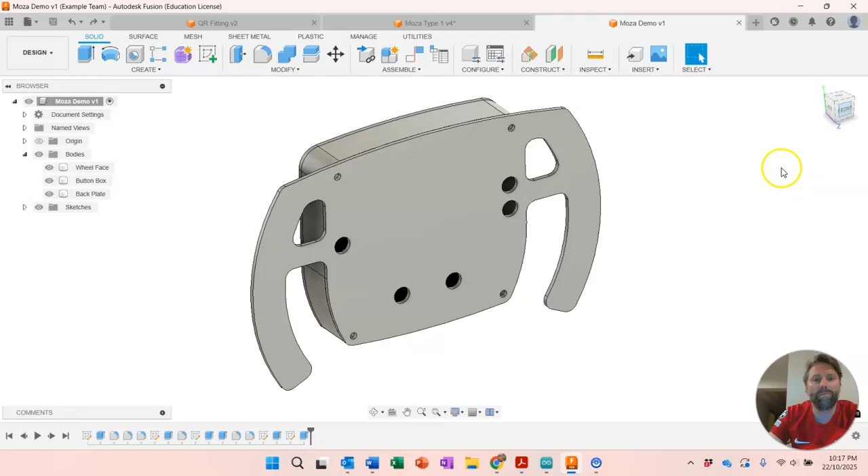We're going to get started on our grip or grips. This example is going to have fairly basic grips, so we're going to start with modeling up this left-hand side front half of the grip. We will end up mirroring this to the other side, but that won't be just yet.

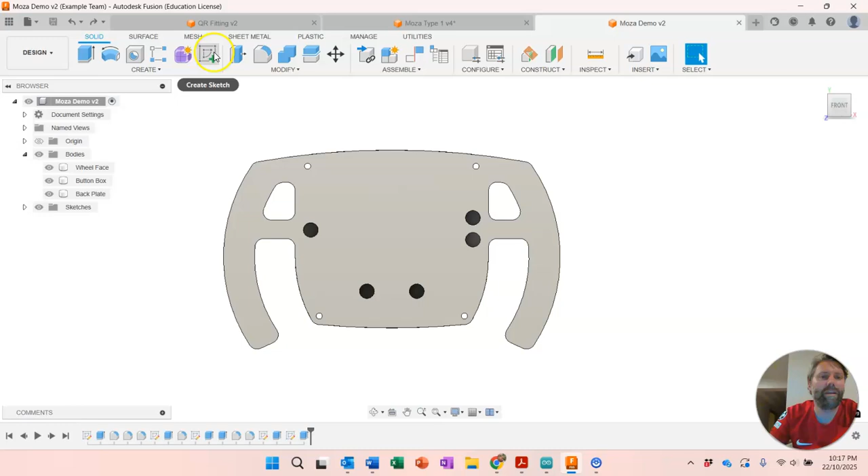So we're just going to design up this front half, front left-hand side. I'm going to start a sketch on that front plate, hit P to project, select the face, and that brings in all these purple lines and dots. Now the dots are kind of handy as I'll use them as reference lines. So the grip is going to come all the way up.

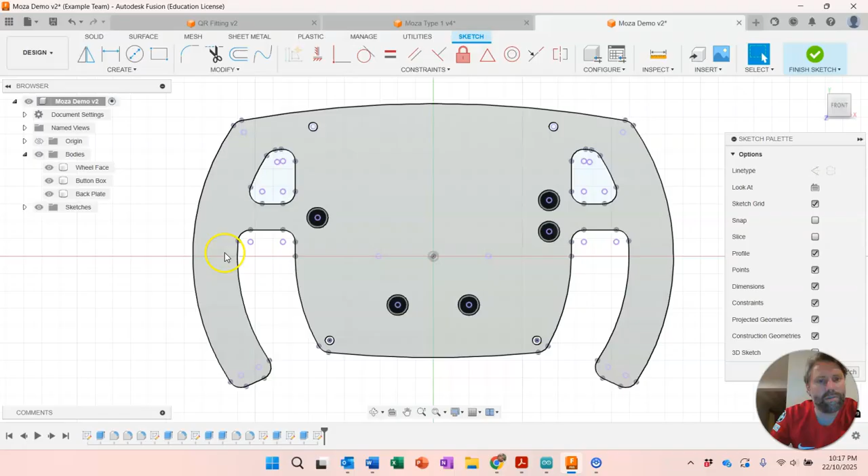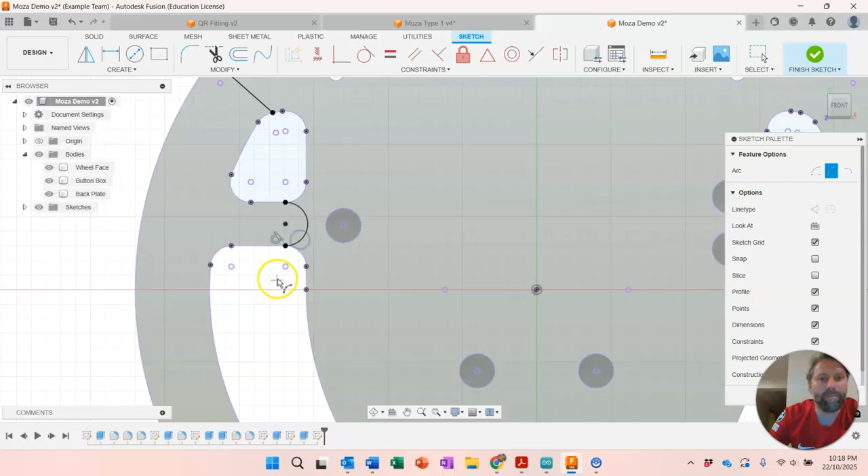I don't need it to extend too much further beyond this top edge here, so I'm going to use the Line tool and just draw one across here. I'll also maybe use the Arc tool, 3-point arc, to join these two. So now I should have an extrudable element which I can create my grip on.

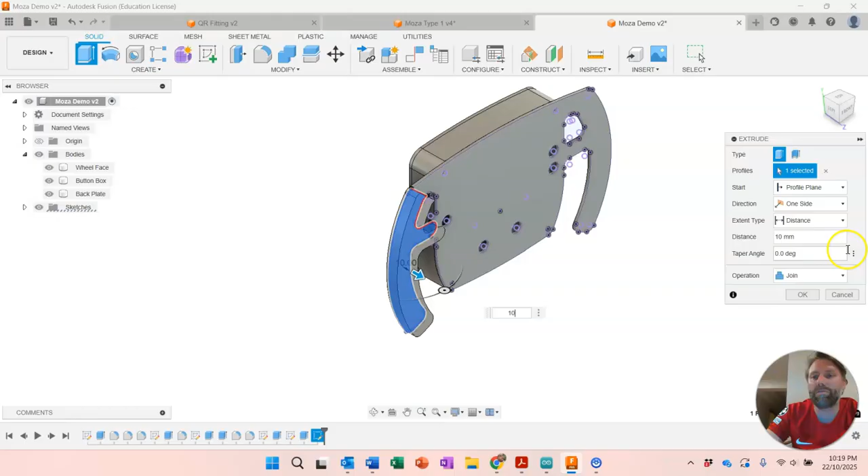So we are going to create this as a new body again. This is going to be 3D printed, it's not going to be a part of our acrylic face. So new body, 10 millimeters, and okay.

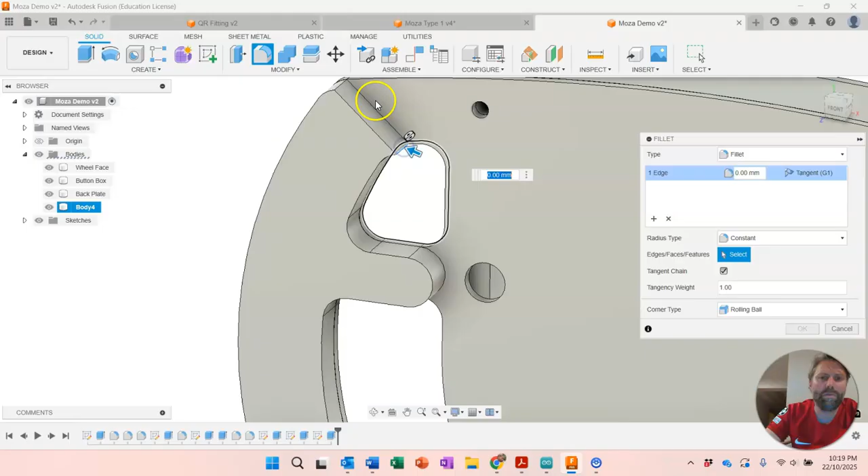Now let's tidy this up. We'll put some fillets in here as well - one up here on these two edges, just to tidy them up. Let's see what 7 millimeters looks like... 7 would be nice.

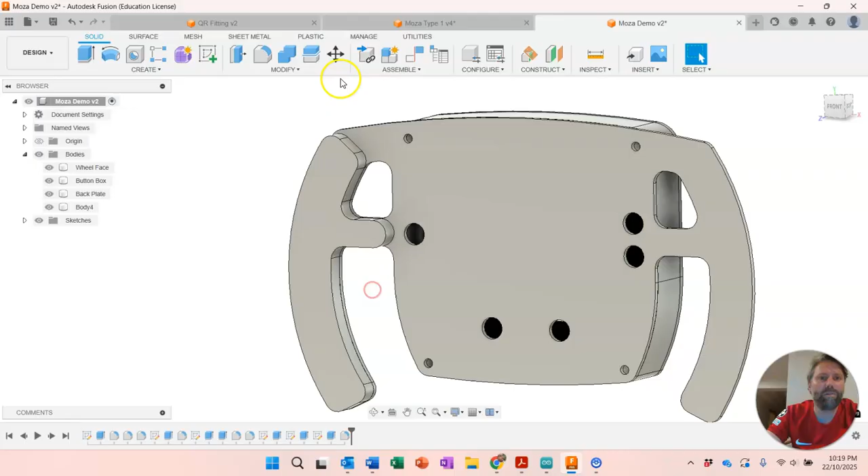And we'll also put a fillet on here as well. Now keep in mind, this is only 15 millimeters wide, so the most I'll be able to put on would be 7.5 to get a perfect curve through there. Let's get 7.5.

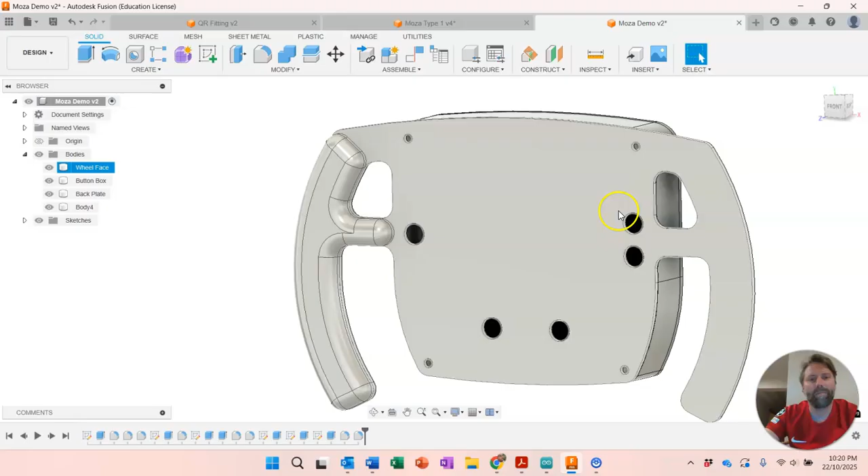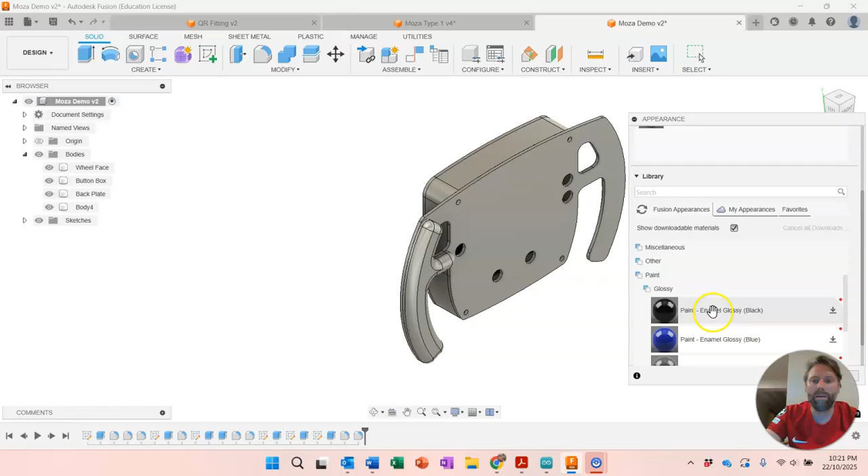So it might be worth at this point adding your colors if you have not already. A brings up your appearance menu, and from here you can bring in all sorts of different colors and finishes. So I'm just going to use paint and glossy for mine, and I'm just going to drag black in for my body.

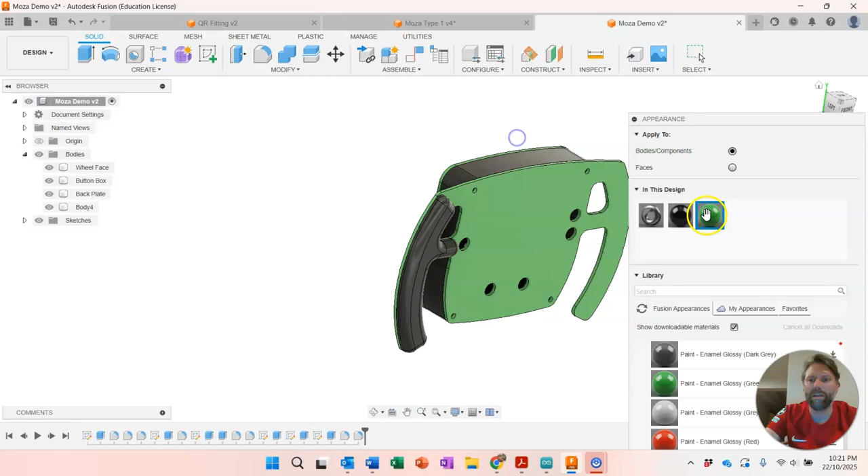I may regret that later when I try to work on it. And we'll go with a green on the acrylic parts, just so I can tell sort of what's what. And I might actually - if you double click on in this design, you can change that color - so I might make it a little bit more teal sort of finish, a bit more Aston Martin sort of green. And there we go.

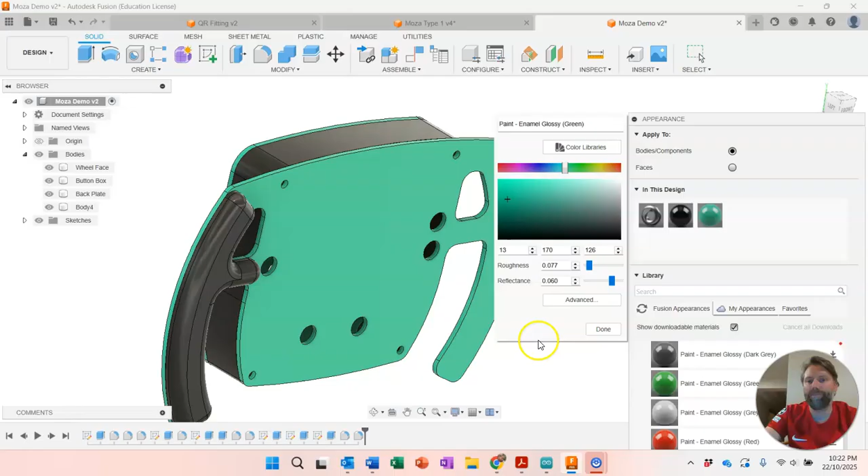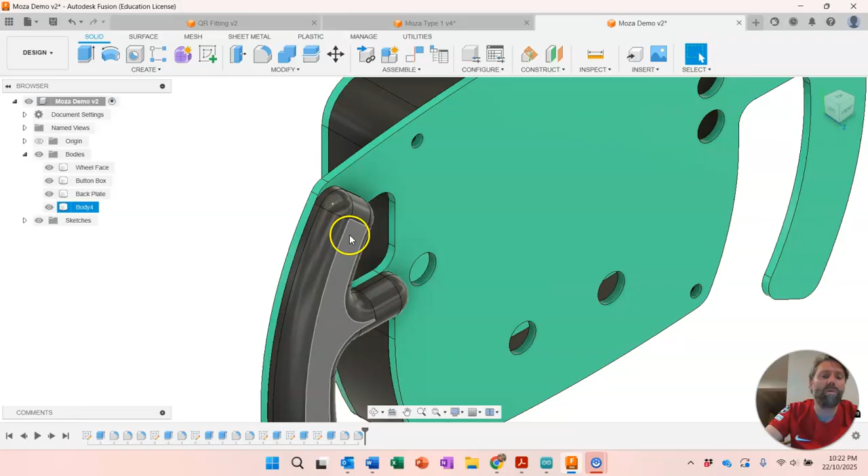Close down it. Before we mirror, there's a few elements we need to add. One is the other half of this grip, and the other is some bolt holes to lock it into place. So we'll get started on the back half of this grip.

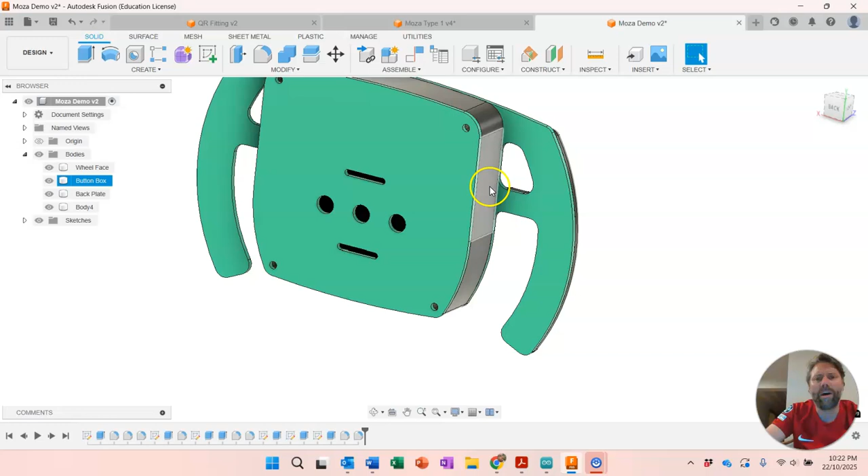Now, I could just mirror this design, this front grip, straight around to the back, because there's no reason why that won't work. What I want to do in this case is make sure it joins into this side of the button box, which adds a little bit more structural integrity to the whole design, and makes it feel a little bit more intentional.

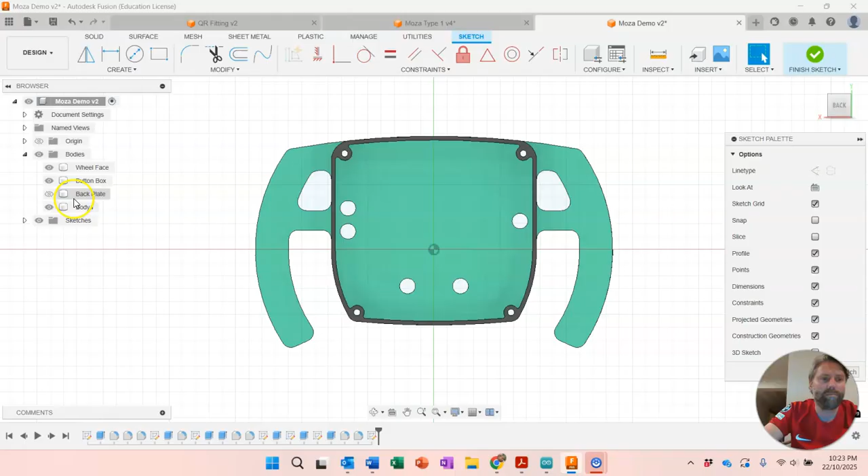So we'll create our sketch on the back plate. We'll hide that back plate - sorry, the back of the face plate is where we created that sketch. Just going to turn off that face, and we can hit P to project that front grip.

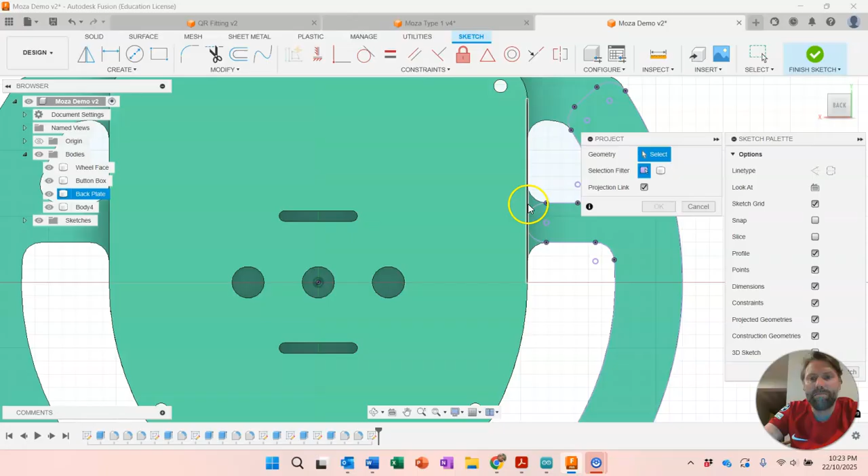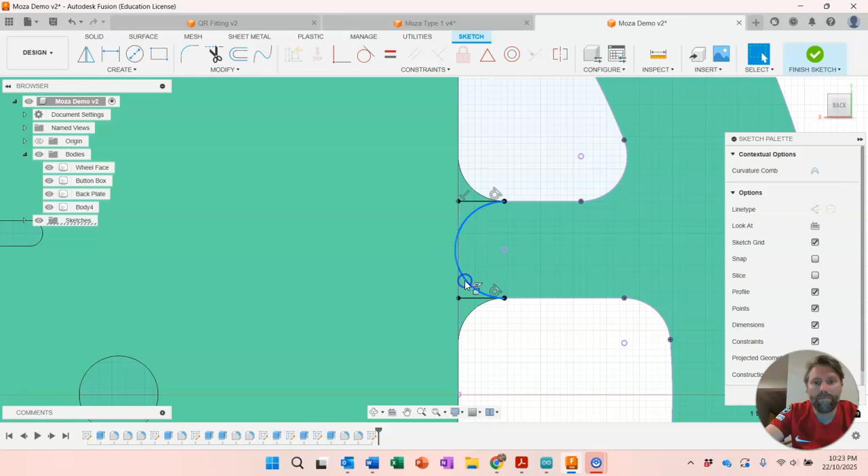And what I'm also going to project in is this part of the button box. In this case, I just want this to continue out straight instead of curving, so I'm going to drag those two elements straight across and make sure that...

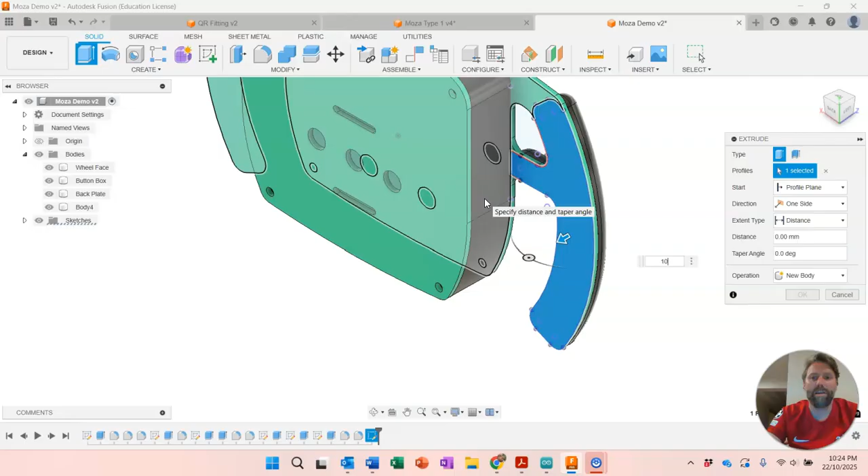I will turn this into a construction line, so now my grip will have a flat section along that back edge. Finish the sketch from here, and we can extrude. Go 10 millimeters again, it's going to be a new body, and we might as well paint it up with our black.

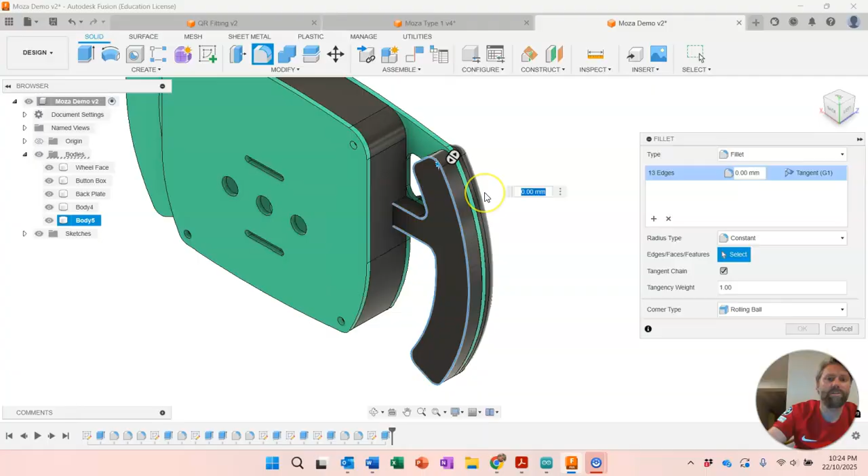Again, we'll put our fillets on. In this case, the top one's already done for us, so we're just going to choose this one, 7.5, enter. Now at the moment, that profile just butts up against the side of the button box. What I wanted to do is project into it just a little bit.

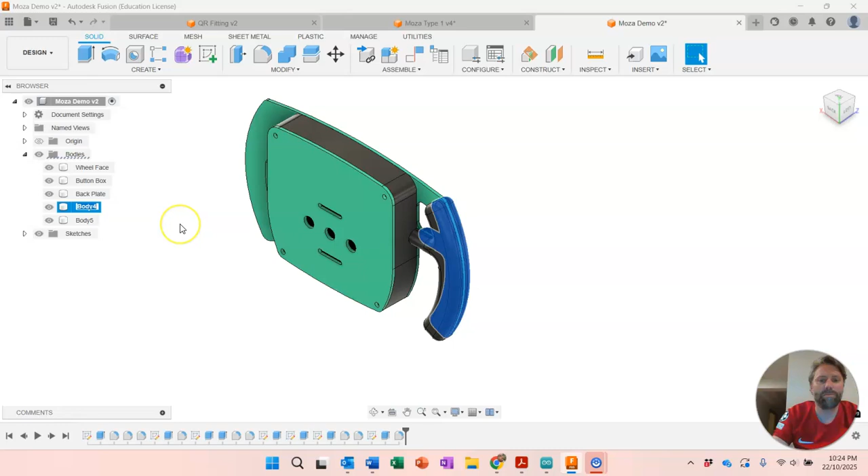So we're going to rename these bodies. We'll spin around. We're going to call this one left grip front, and we'll call this one back.

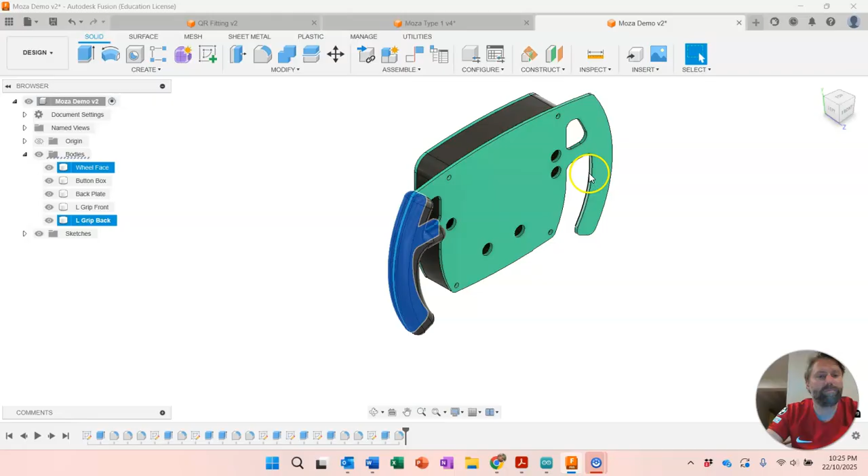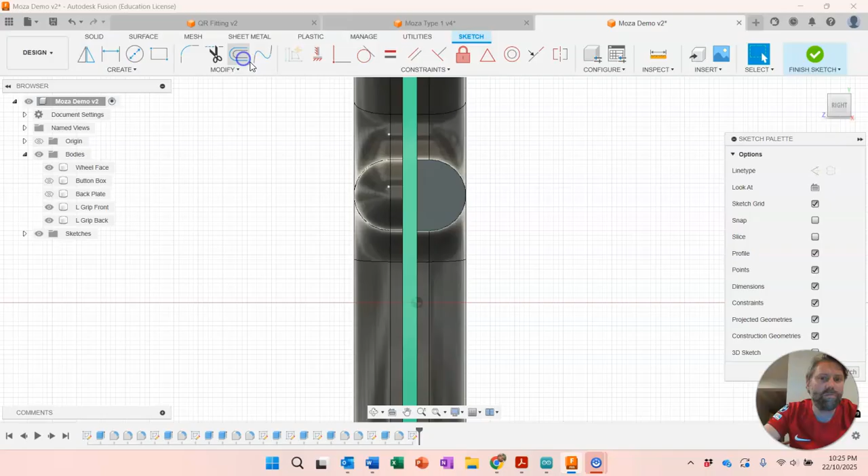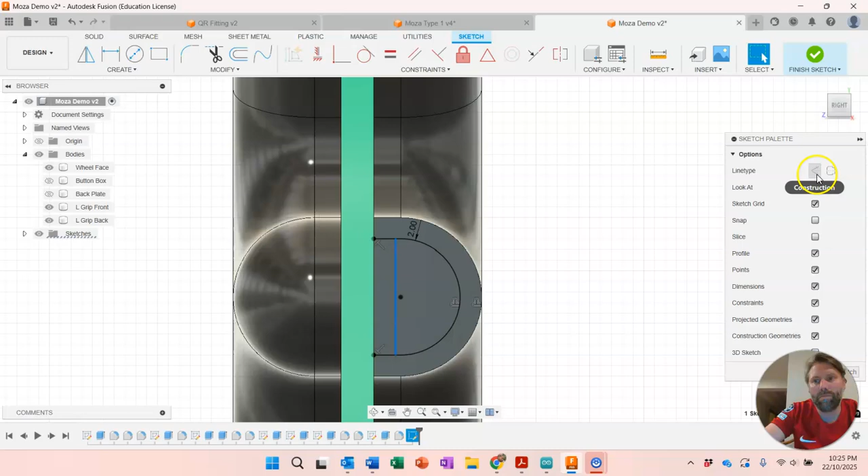So I'm just going to hide the back plate and the button box at this stage, and we're going to sketch onto this face here. Create a sketch, I'm going to use the offset tool, and offset this face inboard 2 millimeters, should do it. I do want to just extend this down a bit, and we'll turn this line here into a construction line. So we've got this profile here now.

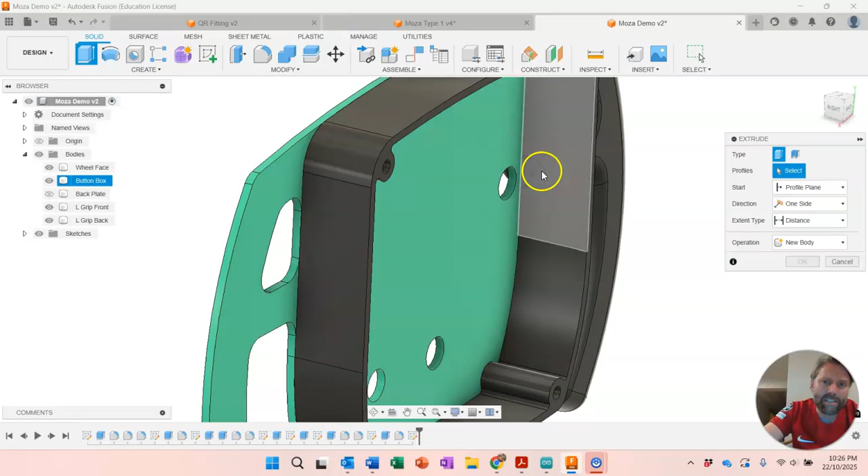Sketch. Now we're going to extrude this through the button box first and make a hole through the button box for this to project into. So we'll turn that back on. We'll go to extrude, and I can see the outline of the shape that I want to extrude, but there's a few things happening in this space.

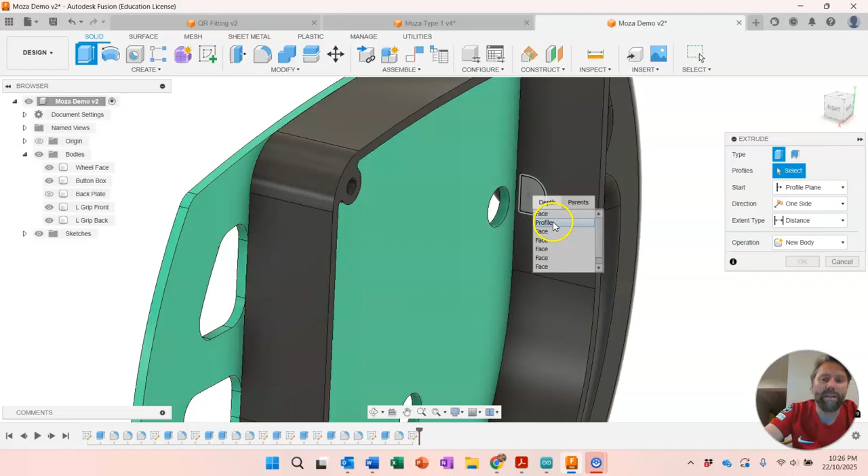So one neat trick is when you want to select this profile through something else, you can click and hold, and it will let you select a range of things from a list. Profile is the thing that I want to select, and we're just going to drag that all the way through and out the other side. Make sure it's cut. So we've cut a little notch right through the back of the wheel.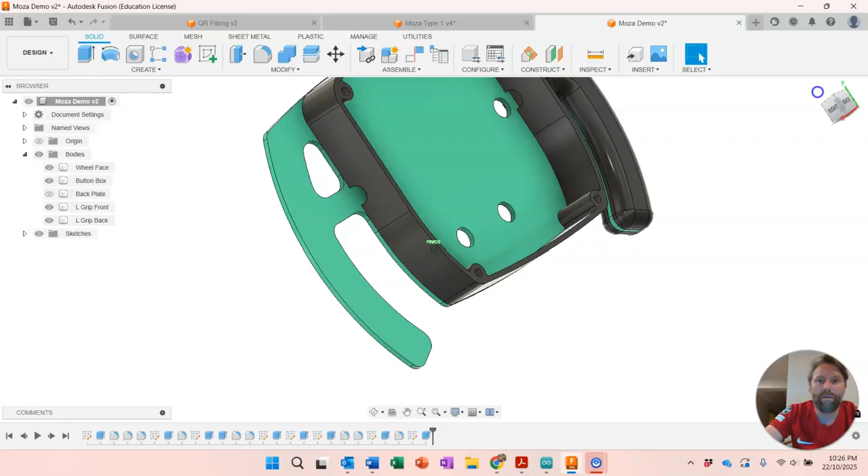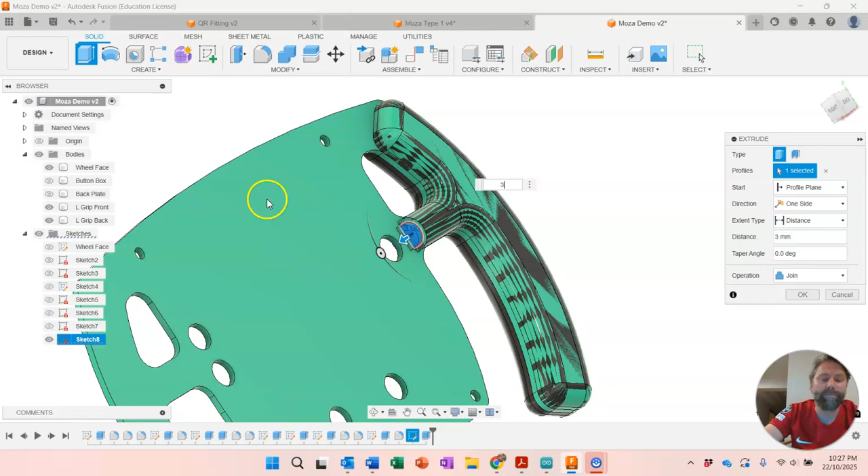We'll turn that sketch back on, so sketch 8 in this case. I'm going to turn off the button box body, and we can extrude that face inboard 3 millimeters. Now, when I've done that, it instantly wants to join my left grip back to the wheel face. I do want this element to be joined to the left grip back, but not to the wheel face, so I'm just going to turn the visibility of that off.

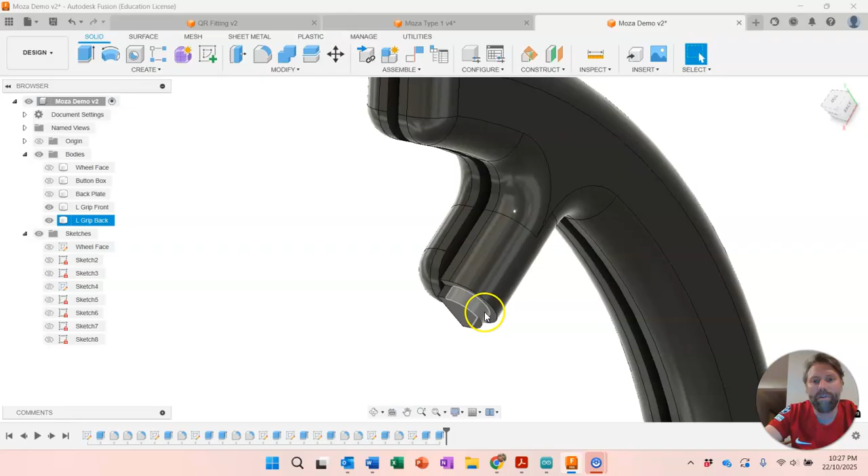So it will join it to this thing, but not to the faceplate. All right, now we can turn that sketch off. We've got that element. When I turn the button box back on, you can see it keys in nicely into that part of the design.

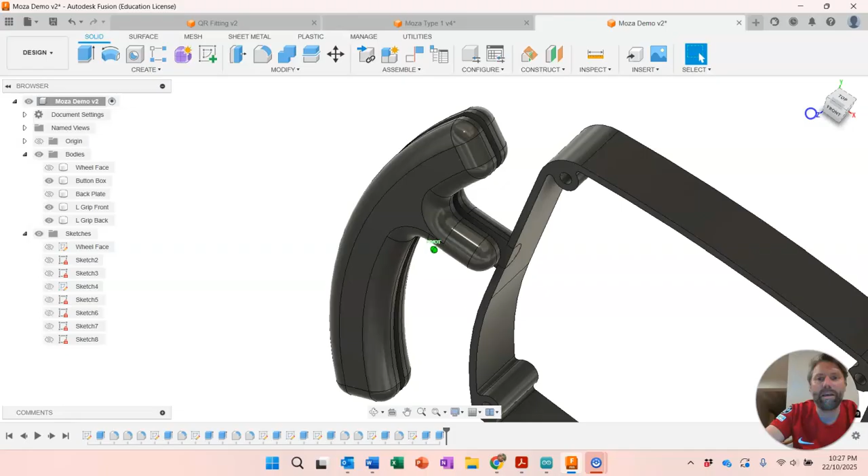All right, next video I'm going to do, we're going to add some bolt holes so that we can lock the grips together through the acrylic face, and that will all hold everything together.